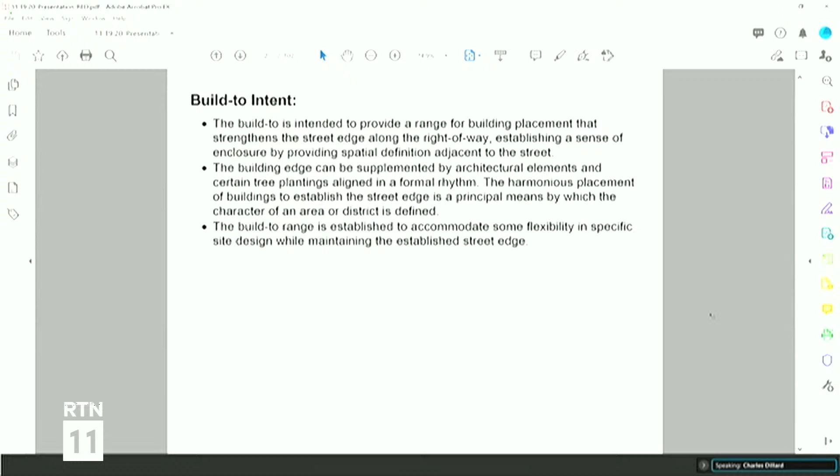I'll give you a brief summary of the alternate request here. The applicant is proposing to develop 6 new apartment buildings with a combined 154 dwelling units. The development provides 179 parking spaces, which is 10 above the minimum required by the UDO. The site is not located within the floodplain, but the southernmost property is within 200 feet of the 100-year flood zone. The property is zoned residential mixed use, 3 stories. The development provides a network of pedestrian paths and an internal centrally located recreation area, including a play area.

The applicable build-to is that of the apartment building type. The build-to is 10 to 55 feet, 70% of which must be occupied by building width on the primary street and 35% on the side street.

The applicant seeks an alternate to the primary build-to for building 1 on the attached plan sheet in your documents. The building occupies 63%, or 7% below the required 70%, and an alternate to the side street build-to for building 6. That building occupies 28%, or 7% below the required 35%.

At building 1, the proposed amenity area is approximately 28 feet wide, which combined with the building width of approximately 112 feet, brings the combined building 1 build-to coverage to 140 feet, or 79%. At building 6, the applicant does not propose additional amenity area. The proposal does meet the 30-foot corner build-to requirement at all locations.

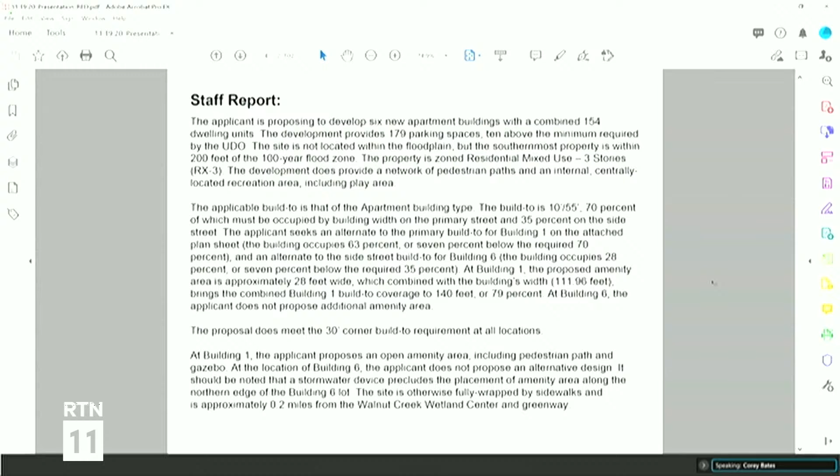Yeah, this is Tim Grissinger, 112 Pipewood Drive in Cary is my home address. 5410 Trinity Road, Raleigh is my business address.

Yeah, I think Jennifer was gonna run with this request. She's our attorney. She did set up the slide, and is that correct, Jennifer? That's right, Tim. Thank you. All right, sorry. Thank you, everyone.

As Tim just said, my name is Jennifer Ashton. I'm a land use attorney with the firm of Longleaf Law Partners. For the record, my address is 4509 Creedmoor Road, Suite 302, Raleigh, North Carolina. As Charles said earlier, the applicant for today is the City of Raleigh. I'm actually appearing on behalf of the developer, who is Solstice Partners, LLC. I'm joined on this presentation with the development team, which includes Tim Grissinger, who you just heard from, and Mike Zaccardo. They are both from the Timmons Group.

So a brief history of the project before I dive into the specific requests. This is intended to be an affordable housing complex. The City of Raleigh has contributed loan dollars to make this project a reality. Once it's constructed, the project will have 6 new apartment buildings and a total of 154 dwelling units.

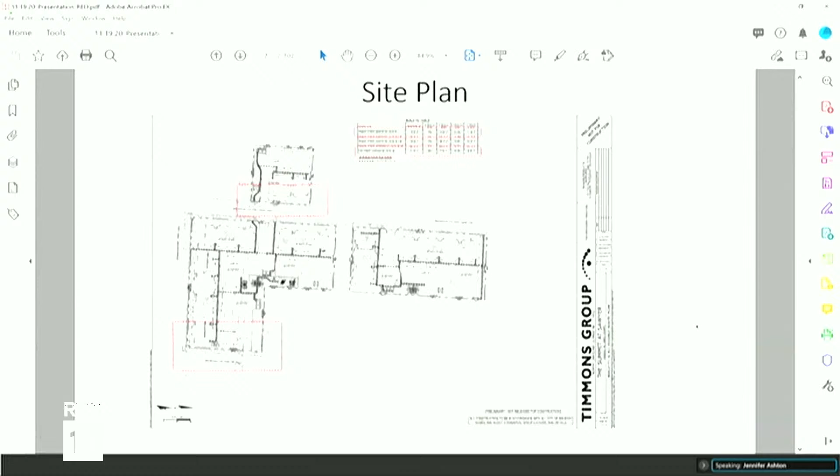So with respect to Building 6, going to this building in particular, down there is Carnage Drive, that is a side street. So for Building 6, we are not meeting the side street build to. We only have 28% of building coverage and we're short that 7%.

To, I believe, the east of Building 6, we do have what we call an amenity area. It is an open field grassed area. We are not proposing any specific amenity features in that area. We thought long and hard about this as we were designing the site, and in all honesty, there is a single family home located immediately adjacent to that grassed area. Our fear was if we put something like a gazebo or picnic pavilion, those have a habit of being noise generators, and we wanted to be respectful and sensitive to the fact that there are single family homes located right next to that area.

There were some stormwater devices located in that area. We can talk about those more in a minute if the commissioners have questions. I think Tim told me yesterday that maybe one of those has been removed from that site. But again, the reason we're not proposing any amenity features in that area is the close proximity to the single family residences.

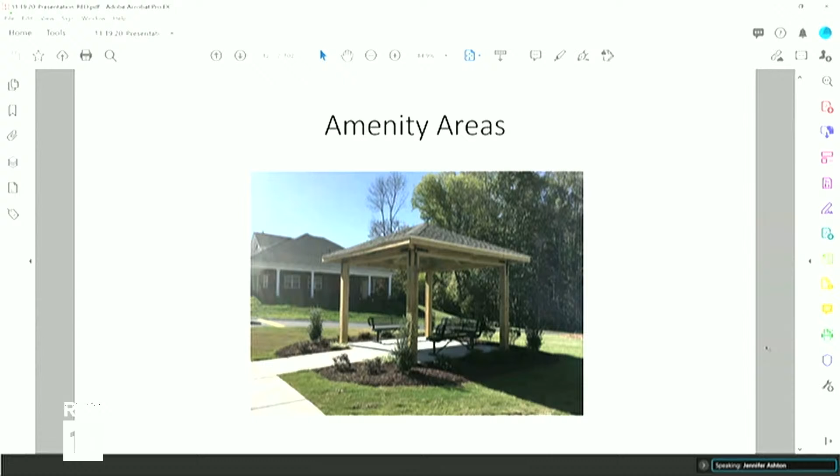Charles, if you could go to the next slide for me. Thank you. This is typical of the gazebo areas that we are proposing. Again, we have a very nice structure with some benches and some landscaping around the foundation. It's a very attractive gazebo. And Charles, if you go to the next slide for me.

Thank you. I'm not going to go through all of these in detail. We've covered them throughout the presentation, but these are the criteria the commission reviews when deciding whether to recommend approval for the administrative alternate. I did want to point out that, as I've said before, I think we are meeting the intent of the build-to requirements. We are providing amenity areas and green space where we are not meeting the specific building coverage requirements, and we are making sure there is significant pedestrian interconnectivity throughout the site so that everyone is able to not only travel within the site easily, but also reach the amenity areas easily.

With that being said, we would request that we get a recommendation of approval to the planning director so that we can move forward with this great project for the city of Raleigh. And I'll be happy to answer any questions anyone has.

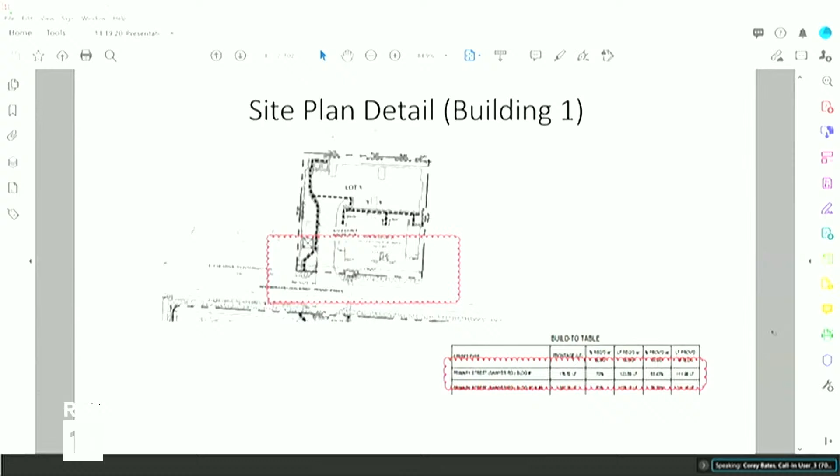This is Will, I'm in favor. Great, okay, opposed? Okay, we'll defer that. And if you can get with them, or Charles, get with them and see if we can get them -- before we move on, I want to make sure they have the feedback they need to be able to come back. I guess I would ask Jennifer Ashton and Tim, do you feel like you have enough information from the commission?

Yeah, I do. I mean, just to clarify, up there along building 1, there's not any placeholder for where that gazebo is located. I could slide it further back so it would not be adjacent to that property to the left, west in plan view. That would not be an issue at all. Like Charles said, we're trying to meet the intent of the code, but yes, that placement could be adjusted.

And then behind building 6, we can absolutely provide better illustrations as to plantings in the area of the amenity space. As previously stated, the developer is not opposed, if that was a condition you guys have, to plant that and, like Adam said, mimic the left side to the right side of the drive. There's no opposition to that. But yeah, I do understand what you guys are looking for. When would the next date be to reconsider the plan again?

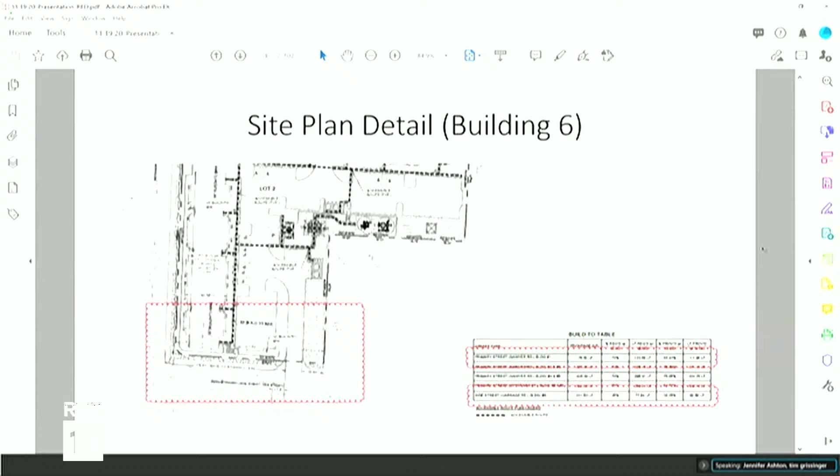Thank you all, we'll just move on. I guess it's the next case, which is your case, AAD 24-20 Toulon Place. Charles, I believe you're going to go ahead and present this one as well. That is right, thanks, Corey.

Thank you. So this is also build-to, so I'm not going to read through the definition or intent, and we'll just begin with the summary. We'll note that the applicant here is not the city, it is BB Redevelopment LLC and Passage Home Incorporated. The applicant is proposing to develop 7 new apartment buildings with a combined 200 dwelling units. The development provides 220 parking spaces, 20 beyond the minimum required by the UDO. The property is zoned residential mixed use, 3 stories, RX3. The development does provide a network of pedestrian paths and an internal centrally located recreation area, including a play area.

So I know this is just up the street from the previous case. And I do want to note that the North Carolina Housing Finance Agency does have, I believe, more stringent parking requirements typically than the UDO, so just want to flag that as an item for discussion, if it comes to that. The applicable build-to is that of the apartment building type.

The build-to is 10 feet, 55 feet, 70% of which must be occupied by building width on the primary street and 35% on the side street. The applicant seeks an alternate to the primary build-to for buildings 1 and building 4 on the attached plan along Bragg Street. An amenity area is proposed along Bragg Street, the length of which is approximately 34 feet. Thus, the combined average length of building and amenity space is approximately 159 feet, or 45%.

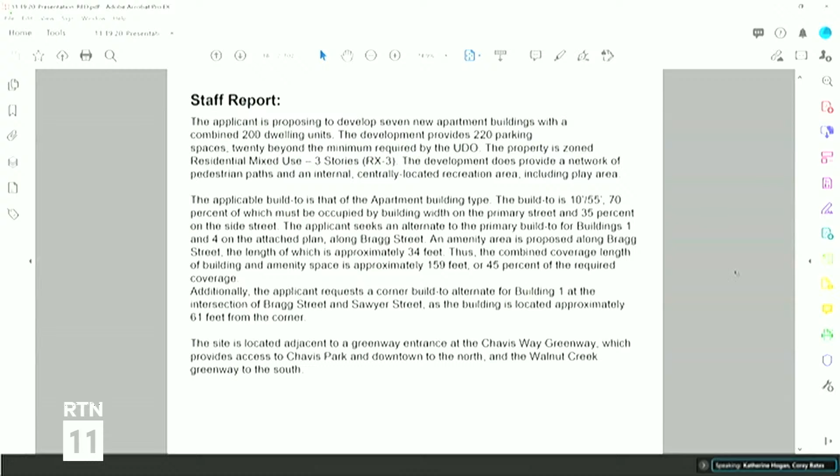Tim and Ashton and Jennifer, is this yours as well?

Are they on mute? Thank you, Chair. Yes. There you go.

For the record again, my name is Jennifer Ashton. I'm a land use attorney with the firm of Longleaf Law Partners. My address is 4509 Creedmoor Road, Suite 302, Raleigh, North Carolina. We're here today on behalf of the developer, Solstice Partners, LLC, and I am joined by Tim Grissinger and by Mike Zicardo, both with the Timmons Group.

By way of history of this project, this is also an affordable housing complex project. We'll look at the site plan in more detail in a minute, but there will be 7 new apartment buildings, 3 stories each, with 200 units total. Given that there is HUD financing and some state funding associated with this, there are heightened ADA standards, and that does come into play with our requests for the administrative alternates.

Charles already changed the slide for me, and he did a great job summarizing our requests. We have 2 requests for this. I want to focus on Bragg Street. We'll look at the site plan in an aerial in just a moment, but both of our requests relate to the frontage along Bragg Street. There's some unique topography along that street that I'll talk about more in a little bit.

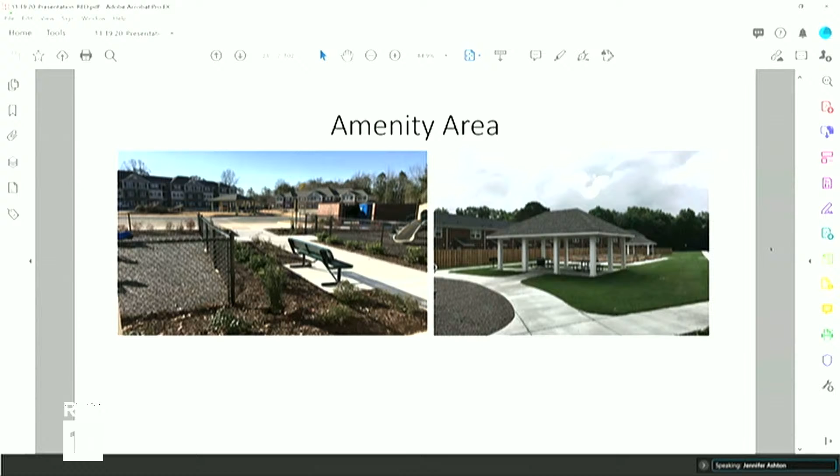If you could go to the next slide for me, please. Again, these are the same photos from the last presentation. I won't spend a lot of time on this, I just wanted to give you some typicals of what the amenity features are going to look like. You can go to the next slide, Charles.

This is not part of the Bragg Street request, but I did want to point out down by Building 6, there is also a gazebo. I did not include a photo of that in this presentation since it's not part of the Bragg Street request, but I wanted to point out that there is also a gazebo between Building 5 and 6. If you could go to the next slide for me, please.

Thank you. I'm not going to go through all of this, but I wanted to highlight that we do believe we are meeting the intent of the build-to requirements for this site. We have added substantial amenities, and we have created new pedestrian connectivity all the way from extending Sawyer to Bragg, with pedestrian connectivity throughout the site. The reason we were not able to flip Building 1 to be parallel with Bragg Street again was the significant grade drop and the need to meet the heightened ADA requirements we have on this site.

With that being said, we would ask that a recommendation of approval be submitted to the planning director so we can move forward with this project. Tim, did you have anything you wanted to add before we take questions?

Yeah, I guess I could touch on, could you go back a couple slides, Charles, showing the zoomed in portion? There you go. The 61-foot corner placement of Building 1, which you can barely see down there to the left. We were requested to tie in Sawyer Road as far away from the intersection of Bragg and Garner as possible. That was one request, and it kind of created a pinch point down there. The property to the south, which you can't really see, is City of Raleigh owned property with the Greenway Trail in that location. So that corner created by the extension of Sawyer Road and our property pinched us down to where we couldn't physically fit a building in that corner.

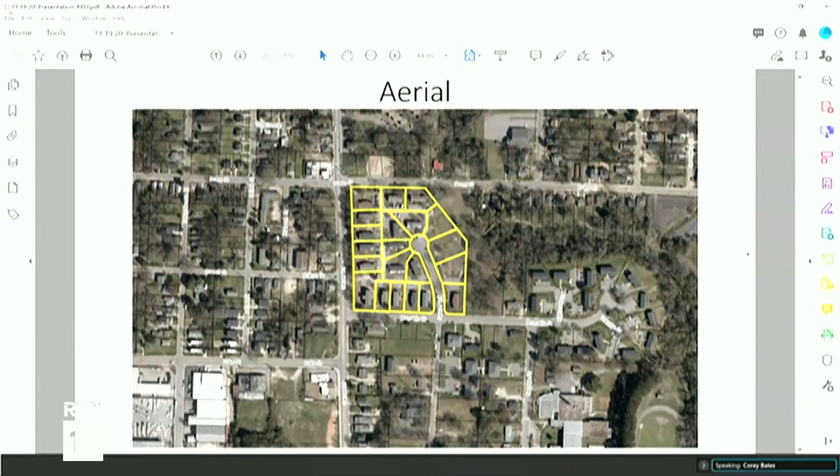Just so everybody's clear, I think the original first slide we looked at, with the overall site plan, showed north and south, and then it rotated. The one before this was, I think, just Google Earth or something. So the site has rotated 90 degrees on the other drawings, just so people are clear. Bragg Street on this slide runs north and south on the page, goes downhill as you go down the page, a substantial drop. I'm looking at it right now on Google Earth. So can you all tell me how the new street compares with the existing location of the Greenway? Is it right at that point?

Go ahead, Tim. I'm sorry.

So the Greenway, if you look on this slide, you can see it at the bottom, and it Y's right there on Bragg Street. So it interconnects - about 650 feet from our corner where Sawyer and Bragg connect. They're in close proximity, and where it Y's to the plan north, really west, it connects to the existing sidewalk on Bragg Street. So we're tying our sidewalk into Bragg at that location close to the trail. Also across to the plan east is the connection of the Greenway Trail on the other side of Bragg Street, so they line up perfectly - the southern sidewalk on Sawyer with the cross connection of the trail on Bragg.

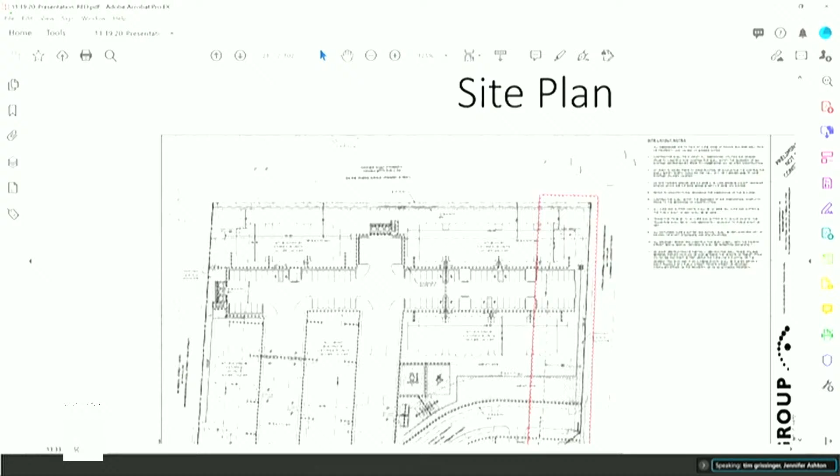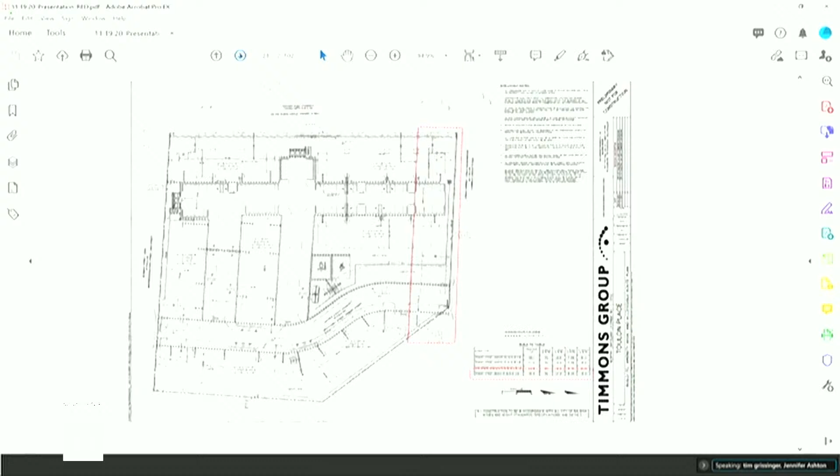If you're looking at this plan, I wish we could zoom in - well, I can. Let me zoom in, I apologize. Across from the amenities where our drive comes in, the wall grades out, and as it goes towards Bragg Street, the first turn behind the play areas is approximately 4 feet, and then where it turns to be parallel with Sawyer Street, it varies in that area from 5 to 7 feet along that wall edge, all the way until you get to the corner of Building 1 and Bragg Street. That corner where it goes up Bragg Street is about 7 feet, I think, right in that area. Again, that wall is due to the steep grades of Bragg - there was no way to really create a flatter spot. I was trying to generate an area above the wall and below the wall, and also maintain that wall, which will have to be grid reinforced, so we had to maintain a certain distance from Building 1 to construct that wall.

And will there be any crosswalks on Sawyer Street internally to the site? Yes, there will be - wherever we have a main intersection, there will be handicap accessibility ramps and crosswalks to get to the other side of the street. Yes, Candace. Okay, thank you. You're welcome.

Can you tell us the slopes on either side of the amenity area, what you're calling the amenity area, on the upper side of the wall and the lower side of the wall? Is it actually pretty flat, something they can play on, or is it trying to pick up a lot of grade quickly? No, I designed it fairly flat. Let me pull up the plans - well, I have the plans, trying to pull up the CAD file. I would say they're about 5 to 10% grade in those areas, so not extremely flat, to get good drainage around the buildings in both of those areas - make up some grade and not have a 10-foot retaining wall there. So it's a juggling aspect, getting decently flat grades and not extensively tall retaining walls. So just to be clear, that amenity area directly adjacent to Sawyer Street that's lower down than Building 1, are you saying the grades are up to 10% there? No, 5. Okay, yeah.

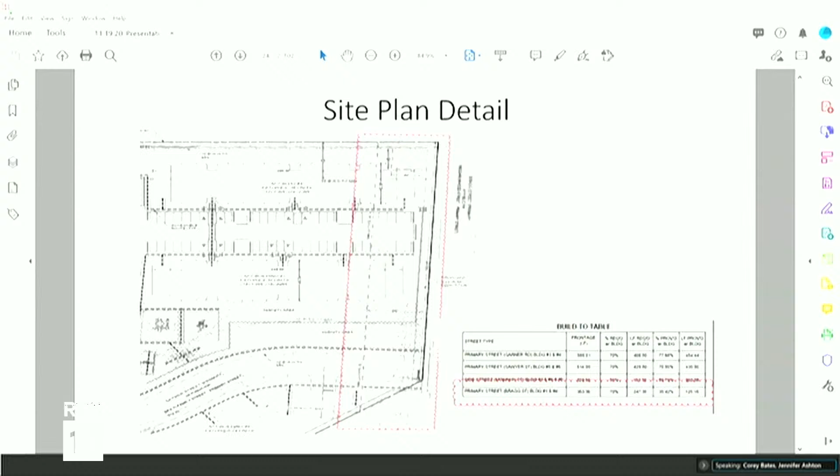All right, we're going to look at AAD case number 3. So we have AAD 25-20, 121 Fayetteville Street. This is the one that we just saw at our last meeting, so I believe mostly everybody was here, so we should have a pretty good understanding. But we'll go ahead and let staff go through it really quickly. I believe, Lee, are you presenting this one? That's correct, thank you Chair.

Thank you. Yes, this is for 121 Fayetteville Street that did just come in for a courtesy review, and they're here today to seek 4 alternates for pedestrian access, transparency, blank wall, and building massing. I'm going to read the intent for each of these, as well as the staff report, and then turn it over to the applicant for more detail. For pedestrian access, the intent is that street-facing entrance regulations are intended to concentrate pedestrian activity along the street edge and provide an easily identifiable and conveniently located entrance for residents, visitors, and patrons accessing a building as pedestrians from the street. And second, that access points should be located or identified in a manner visible to the pedestrian from the street and be accessible via a direct path.

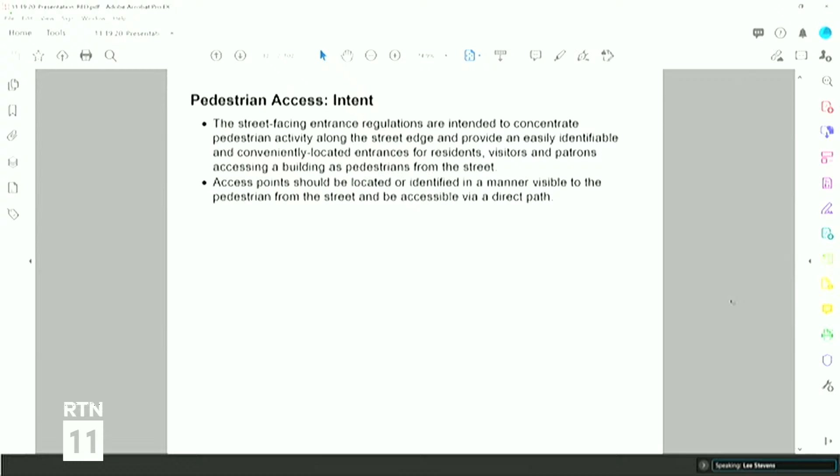In this case, the applicant is proposing to redevelop a 1.25 acre site located at 121 Fayetteville Street, zoned downtown mixed use, 40 stories, shopfront frontage. The site currently contains a parking garage with retail spaces on the ground floors along both Fayetteville Street and South Wilmington Street. The applicant is proposing to build a 32-story mixed-use building on the southern portion of the site. Although it says they'll retain a portion of the parking garage, they're actually going to tear down the existing parking garage and rebuild their own.

The applicant is proposing entrances along Fayetteville at intervals of 50 feet or less, except where the elevator bank sits, where there will be a distance of 73 feet between doorways. I'll also state that for downtown shop frontages, we require 50-foot spacing between entrances.

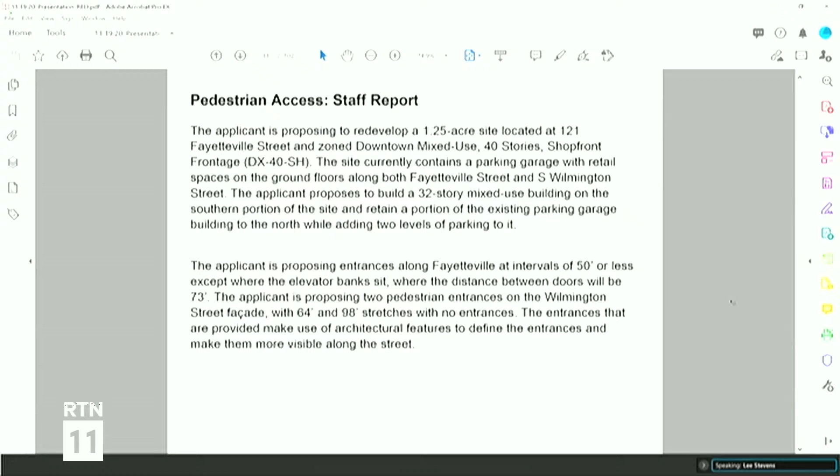The applicant is proposing 2 pedestrian entrances on the Wilmington Street facade with 64 feet and 98 feet stretches with no entrances between those. The entrances that are provided make use of architectural features to define the entrances and make them more visible along the street.

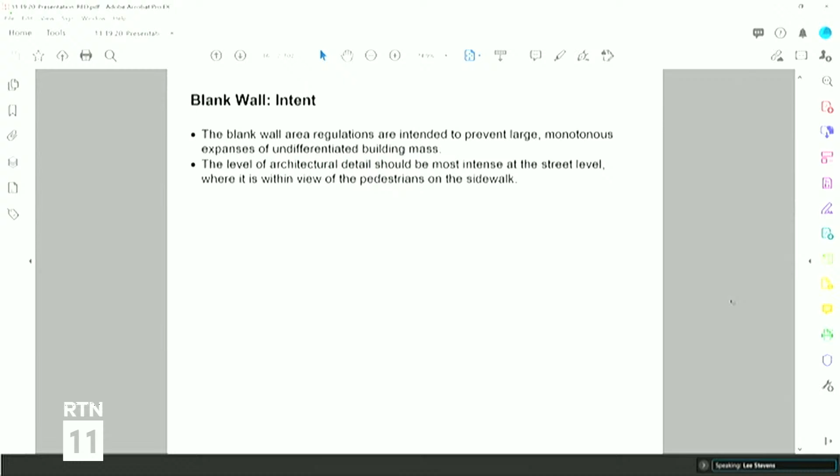The east elevation of the building contains 37% blank wall area comprised of articulated metal screening, and the west elevation has a blank wall area of 24%, which is also articulated metal screening. The applicant is proposing to use folded architectural metal panels, aluminum trim, color variation, and a large art installation to offset the blank wall areas. The level of architectural articulation and detail is concentrated at the street level to emphasize visual interest for pedestrians.

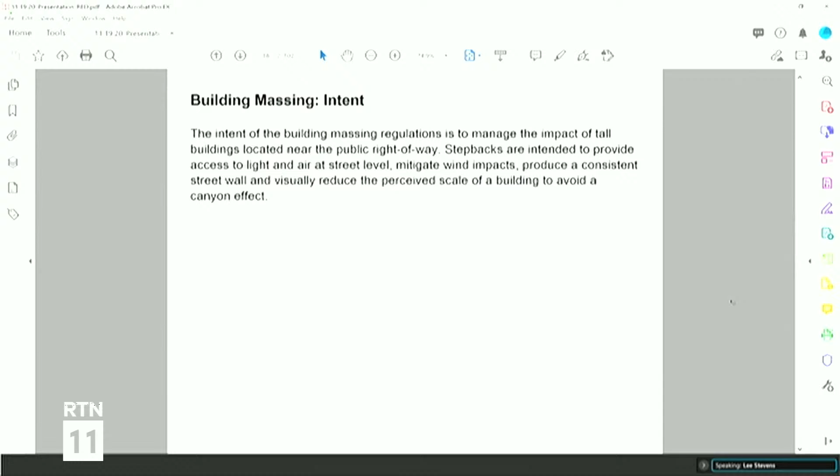Now for building massing. The intent of the building massing regulations is to manage the impact of tall buildings located near the public right-of-way. Stepbacks are intended to provide access to light and air at street level, mitigate wind impacts, produce a consistent street wall, and visually reduce the perceived scale of a building to avoid a canyon effect.

The applicant is proposing to develop a 32-story mixed-use building. As proposed, the building does not meet the massing standards that require a 15-foot minimum step back between the 3rd and 7th floor on both the Fayetteville Street and South Wilmington Street facades, which will both have 0-foot step backs.

In the attached information, the applicant describes a 100-foot step back to the north towards the historic state capitol building. The applicant also mentions that there are material changes between the ground level, parking levels, and office levels to mimic wall plane change and delineate the facade. The applicant has provided plans, elevation, and renderings to illustrate the proposed design.

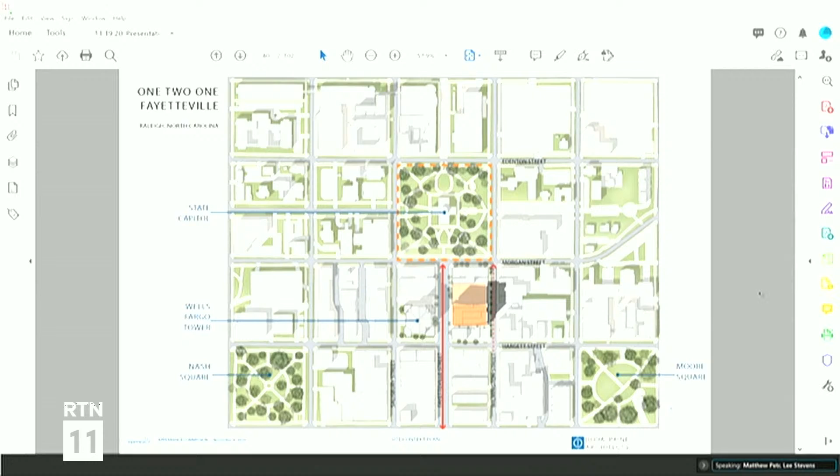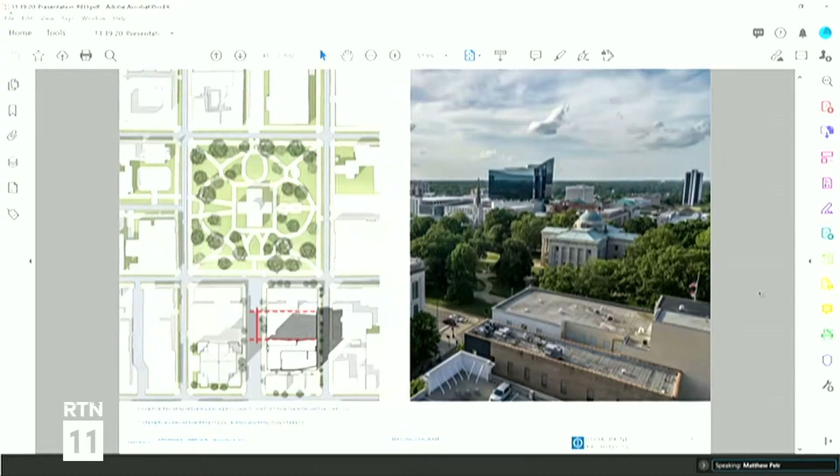If you just want to click through, this was the datum slide. There's a sketch that Tehran provided. You can keep clicking through here, and we'll get to a ground floor plan that's colored, and I'll let you know. Anyone, if you want to stop on something, please just let us know.

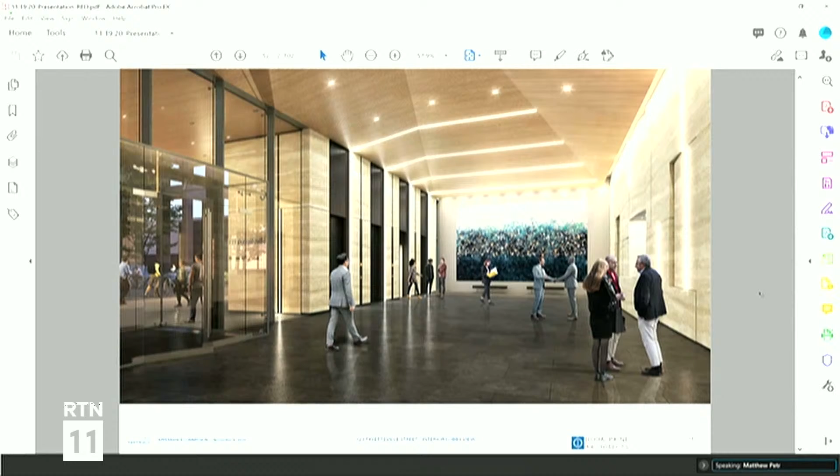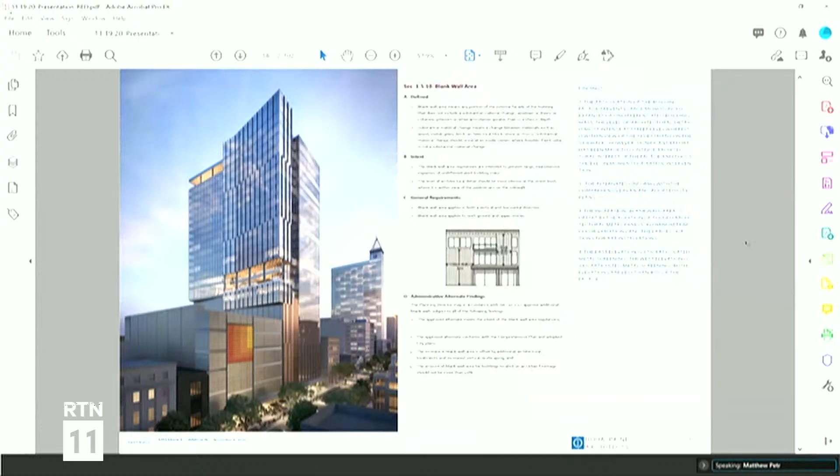Lee, if you keep clicking through, go to what I believe is the last slide of ours here - the more detailed site plan that's with the ASR submission, because there's also some trees that will be added. It's hard to see here, but if you were to zoom in, you could see there's trees going to be added to the pedestrian passageway too. That's another really important element of this project, because the existing passageway is kind of underutilized and underdesigned.

So McAdams and the team were tasked with coming up with a new design for it. There's a few really small trees that'll be planted in there, along with some softscape, and then all new hardscape in between. So I hope that answers your question on the trees.

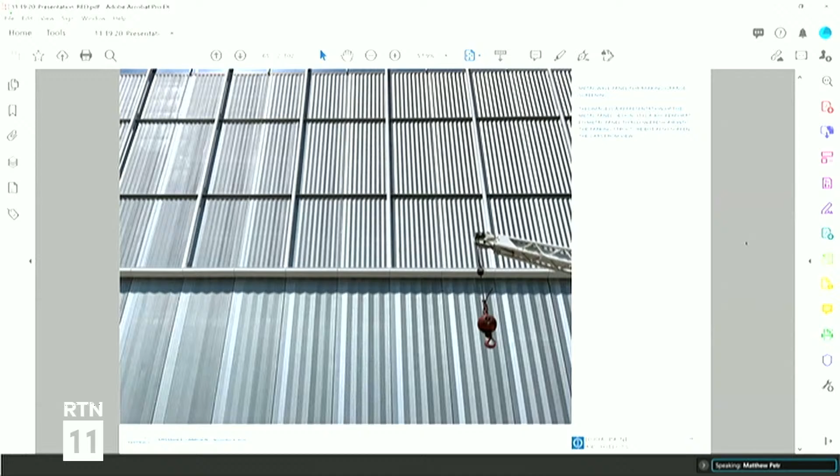And then if you go back one slide, you can see the perforated metal panel. Just a caveat here, this is another project, so ours will be a different design. But for those of you familiar with these perforated metal panels, this is a panel done by Morin, and what's really great about this panel is they have two profiles that we like to use in some instances to create more grain and texture.

So in part of the building, we use the profile you'll see on the bottom, which is a 12-inch wide panel with a single fold that has a wider texture. In other places where we try to reinforce other elements in the building, we use the smaller panel that has two folds in the same 12-inch panel, giving it a finer texture. So you can change color on the panels, but you can also change the number of folds to create a finer grain.

Those things allow us to create variations in the envelope that help reinforce some of the elements on the exterior. And then the other thing we always like to do is when the building sits above the parking deck and we have the glazing—you can see it at the top of the screen where we have mullions and articulation—we carry those lines down over the garage skin so that it feels like a unified, cohesive design.

This is a different project that's under construction right now, but we're using the same panels on this project and the same perforation pattern, a 40% perforated round staggered pattern, to allow for an open parking garage per the code.

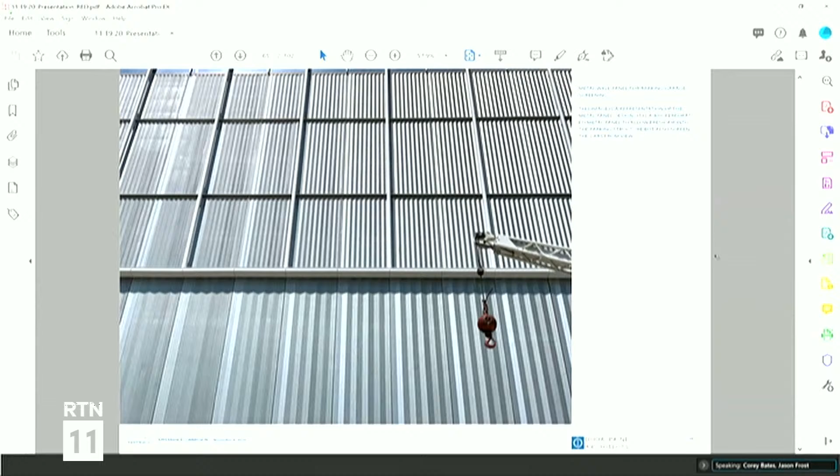Potentially. Lee, could you go forward one slide to that new site plan? I think it's 66. Could you zoom in on that area? Because I don't think we've got that in the material I saw.

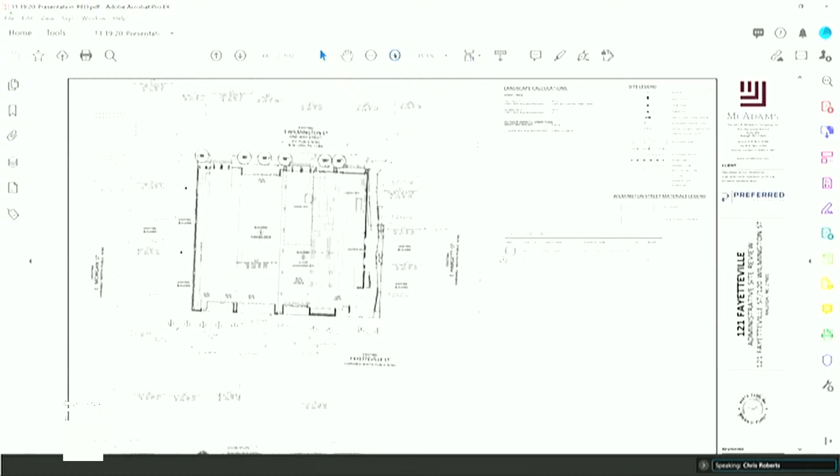Do you need me to go in any closer? Is that a good view? Maybe just a little bit more if you could. Thank you.

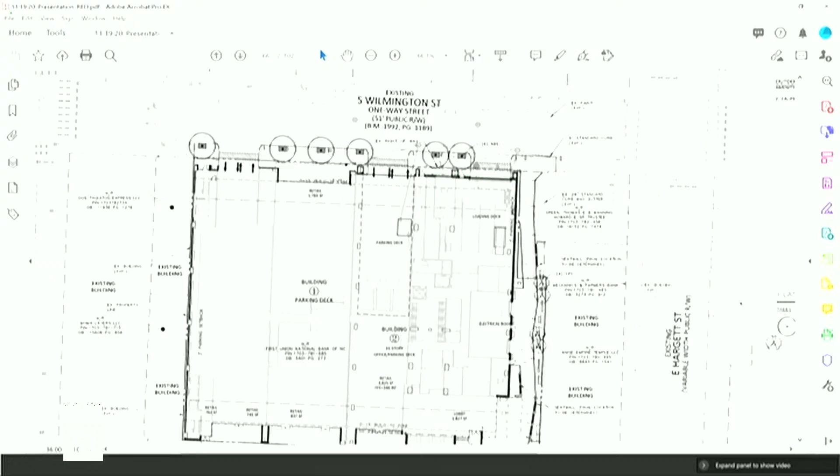And Dave, can you talk about the species of tree as well? I think it's on the top right corner of this image. Yeah, Wilmington is trident maples. The Fayetteville Street will be the oaks to remain. And currently in the gallery we've got dogwoods, but that could potentially change as we move through CDs within that space. It will be small upright, just given the conditions down there, the canyon-like conditions.

Thanks. Thank you. Yeah, that's good. Thanks. I've got another question on...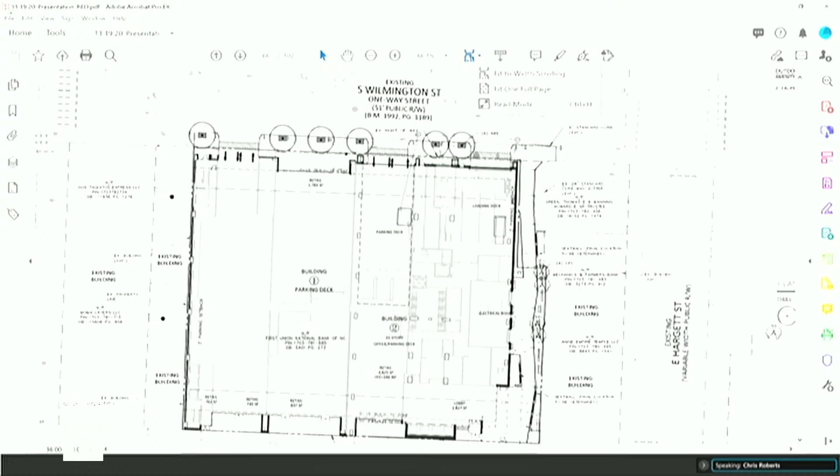The first floor site plan that showed the street trees, unless anybody's got any other questions on this sheet. No, I was just going to say thanks for showing those. I think the maples are playing off of what's already there. Isn't that right, Dave?

Correct. They just won't be the sad wisps that are out there right now. Yeah, they are grouped tightly, but we were able to get the full code minimum in there and incorporate the driveways.

While we're looking at this, why is there a gap between the trees on Fayetteville? Is that an existing gap? Do you know what that's about? That's the current entrance to the deck, so there's the wide painted pedestrian crossing that goes over to the Fargo Plaza.

So how are you all going to deal with that? You don't want to put trees there once you get rid of the entrance? No, we're not disturbing anything outside the property limits. So all that's the city's right of way and part of the larger pedestrian crossing.

I'll also note that pedestrian crossing will still be used. A lot of this parking on the north side is serving that building across the street, so that's something we were taking into consideration as well, making sure those users have a clear pathway to that project.

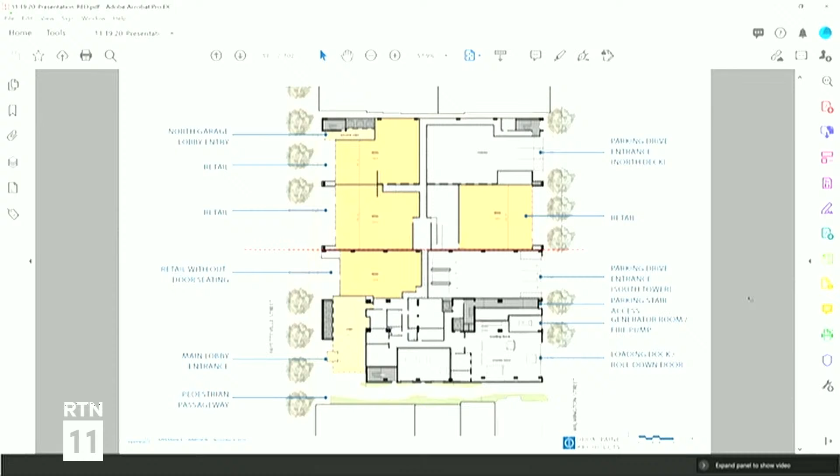Bear with me as I'm getting through to my... Corey, I've got the findings for transparency up on the screen. Thank you, so these are the findings we need to look at.

The approved alternate meets the intent of the transparency requirements. The approved alternate conforms to the comprehensive plan, adopted city plans, and the street-facing building facade utilizes other architectural treatments to create visual interest and offset the reduction in transparency. I think 1 and 3 we've gone through, and I feel pretty confident that we meet the intent. The approved alternate conforms to the comprehensive plan.

If we can look at our policies and throw out a few. Policy UD 1.4, maintaining facade lines.

UD 2.3, I think activating the street. Yes, I think it does that. UD 4.5, improving the street environment.

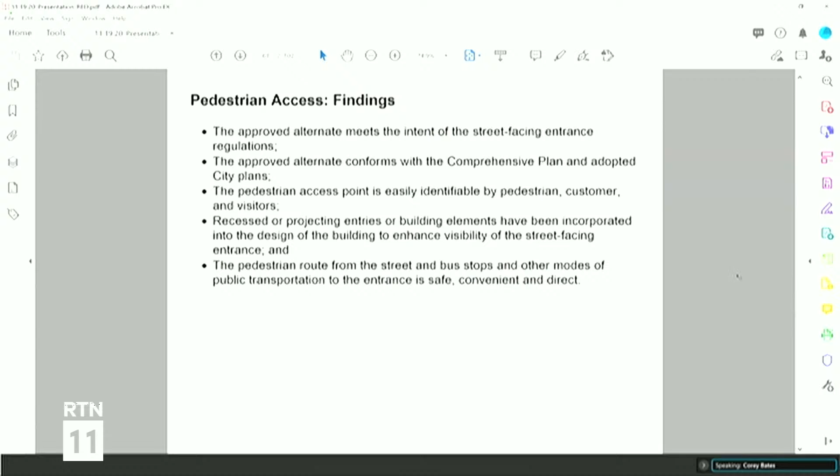So if we can look at the findings: UD 1.3, LU 5.1, UD 4.5. Okay.

All right, that's good. Do we have a motion? I'll move to approve this one too. I'll second it, Chad? Second from Chad, motion from Chris. All right, all in favor? Okay, any opposed? None being, that passes unanimous.

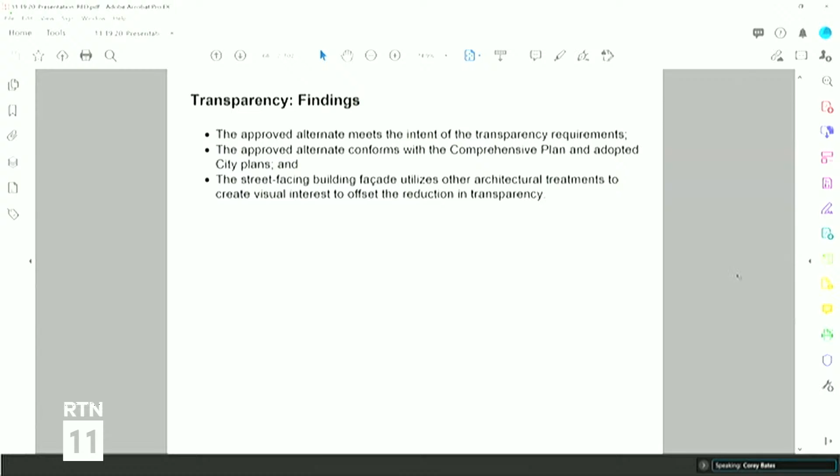All right, let's move on to blank wall. Blank wall findings: the approved alternate meets the intent of the blank wall area regulations. The increase in blank wall area is offset by additional architectural treatments and increased vertical landscaping, which we've talked about both, I believe it does. The amount of blank wall area for the building located on the urban frontage should not be more than 40%.

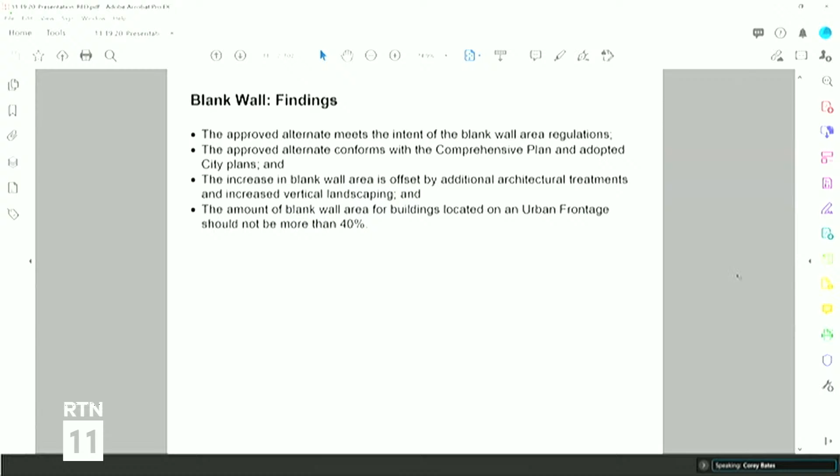Any questions with any of those? Being none, let's go to the approved alternate conforms with the comprehensive plan, adopt the city plans. Can we look at those findings? UD 1.2. That's UD 1.3.

Any others? Okay, I think that's fine. Any other comments? None being, do we have a motion? Motion to approve by Chad. I'll second that, Chris? Motion from Chad, second from Chris. All in favor? Any opposed? All right, pass. And the final one is the building massing.

Again, I think we talked about this last time, I think we've seen this before. There's a text change that they're looking at on the table. I think it's a beautiful building and they did a great, fantastic job. So let me see if I can get to these findings. Somehow I messed up my computer.

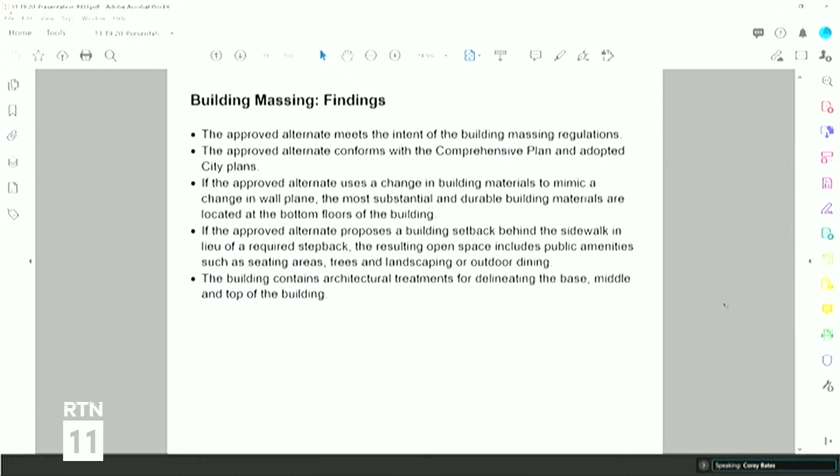Okay, the approved alternate conforms with the comprehensive plan, adopt the city plans, and substantiate that. LU 5.1, LU 7.4 scale design, UD 1.2, UD 1.3, DT 7.5. All right, that's 5. Did you get all those, Lee?

I'm going to read them back to you just in case. I got LU 5.1, I think what 7.4 - I didn't catch what that one was. LU 7.4, thank you. LU 7.4, UD 1.2, UD 1.3, and DT 7.5. Correct. Okay, wonderful, thank you.

All right, any other further conversation? If not, do I have a motion? Motion to approve by Chad. Second, second from Adam. All in favor? Any opposed? Okay, that passes unanimous.

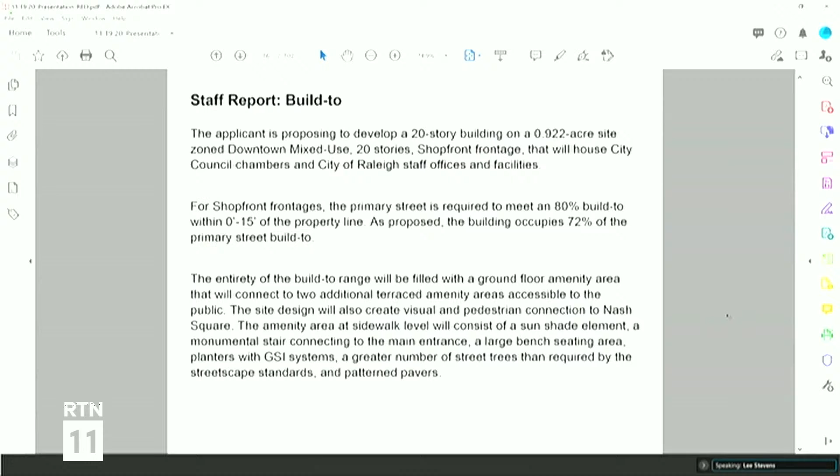The entirety of the build-to range will be filled with a ground floor amenity area connecting to 2 additional terraced amenity areas accessible to the public. The site design will also create visual and pedestrian connection to Nash Square. The amenity area at sidewalk level will consist of a sunshade element, a monumental stair connecting to the main entrance and to the terraced amenity areas, a large bench seating area, planters with GSI systems, a greater number of street trees than required by streetscape standards, and patterned pavers.

Now for building massing. In lieu of the required 15-foot step backs on both Hargett Street and McDowell Street facades, the applicant is proposing an increased setback of 15 feet for the building to extend the sidewalk area and provide greater amenity space to the public realm. Awning elements at the first and second floor create facade articulation to help reduce the perceived scale of the building, and the terraces on the western facade create a 70-foot step back at the 3rd floor.

So now I'm going to turn it over to the Civic Campus team to talk more about the project. Aaron, if you could unmute Andreas, I believe, and Daniel, they will be our main presenters.

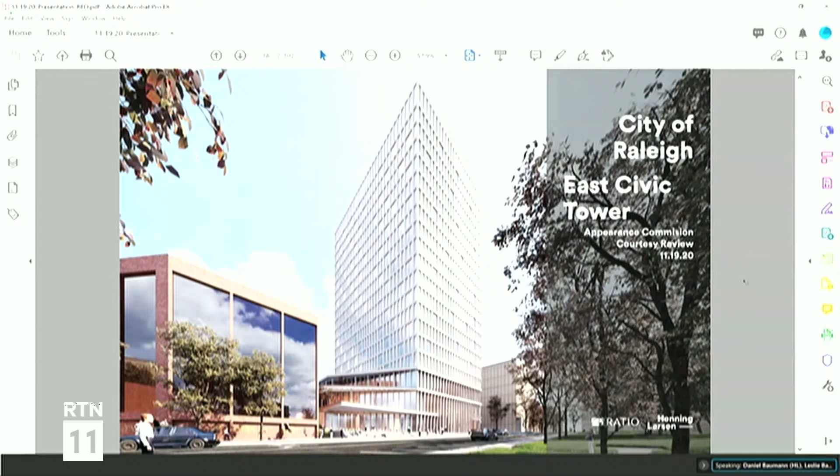Great, thank you so much, Leslie. I'm excited to take you through the project. We're going to go through two things: a project introduction, introducing our design thinking, and then zooming in on the key zoning items we want to discuss with you guys. Let's start with the project introduction.

The overarching ambition here is for us to create a civic icon, a place for people, and really create a face for public service. Our location is right on the intersection of Hargett and McDowell, opposite Nash Square.

Our ambition is to create a beacon in the city, part of the urban landscape. We want to lift the tower up seemingly from the lower floors, opening up the lower public-oriented floors that have public function to the city. This is the overall idea: a solid tower that sits on a very transparent and light base.

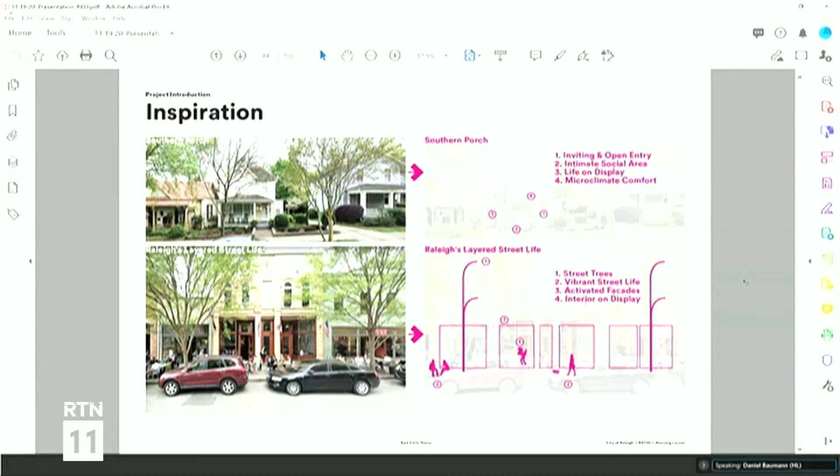Our inspiration comes from Raleigh. We love the idea of the southern porch as this inviting, gestural element that creates invitation and puts life on display, with an aspect of comfort and microclimate. We also observed the street life in Raleigh—these layered facades, the textures of the trees, and putting the interior on display.

On the ground level—this is from concept design, which we're working towards updating—we're proposing a large interior lobby connected to an outside amenity area, and an interior public service area that will consolidate a number of public functions in one connected area for a one-stop shop.

The second floor is also public and publicly accessible. Here we'll have the council chamber, access to a public terrace overlooking Nash Square, and an art gallery available to visitors. Visitors can come and see the council at work and democracy at work.

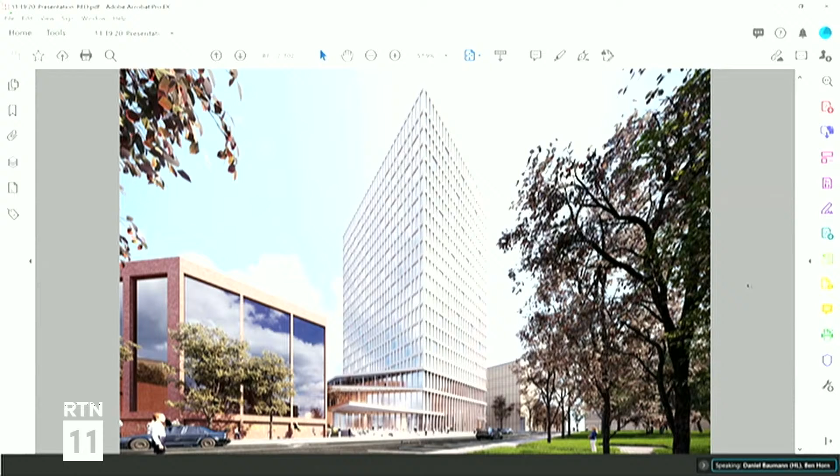This is a preliminary view of the building. We're currently working on developing the facade, but this is the overall expression of the building as we're anticipating it, and the overall massing as it stands now. What you can see here is this transparent base of 3 stories that are publicly oriented, and the canopies we're trying to develop create shaded areas that at grade are amenity areas, and on the upper levels are publicly accessible terraces related to the interior program.

The key building metrics show the overall tower massing. We have 3 public floors with terraces to the southwest, fanning back to provide terraces at every level related to the interior program. Then we have an efficient administrative building on top of that, taking us up to 20 floors, around 300 feet.

For the ground floor, our thinking is to treat this as a civic porch, connecting and linking it to the park. We're working actively to be considerate about our ground level landscape design, but also incorporating larger elements that will activate the ground plane and knit the inside and outside together.

In this view you can see how we're starting to think about the public realm and how that landscape from the park is fanning up at grade, introducing itself at every level of the building, trying to create a linkage between Nash Square and the building on the other side.

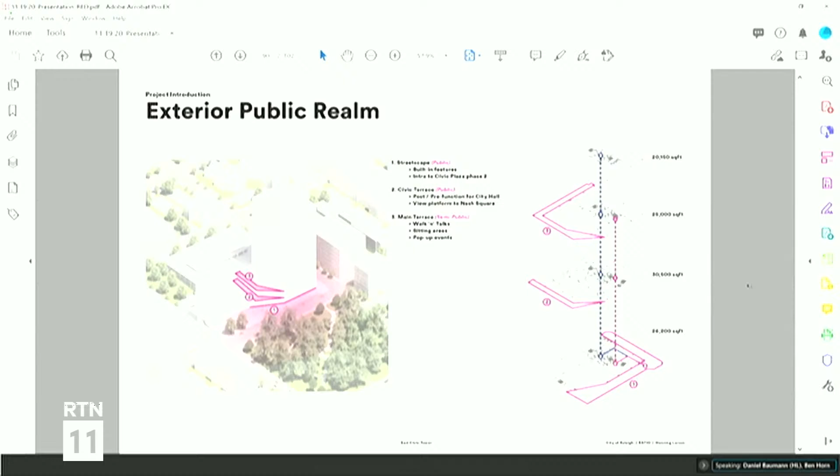On the site plan at grade, we're anticipating a planted area, a series of street trees along Hargett and McDowell that will create shade, and a furnishing zone in between. We're working with this large element of the civic porch. The entrance is from the corner of Hargett and McDowell, and this covered area is where we anticipate arranging public lectures, introductions, and smaller functions before going into the actual building itself.

We're anticipating some pervious and impervious areas here. This is just a preliminary take, we're designing this as we speak, so we'll figure out how to incorporate this in a way that works with the overall planning strategy.

Our boundaries in pink are shown here as the property line, and we have a 16-foot streetscape requirement from the edge of curb on both Hargett and McDowell. We're allocating a 15-foot amenity area along the south and east part of the site, folding back on the southwestern portion to create this increased amenity area and large feature stair, working with seating arrangements and incorporated plantings.

We're incorporating some safety features, looking to do those as part of the design in order to make them part of the overall expression—so just secure, but also playful.

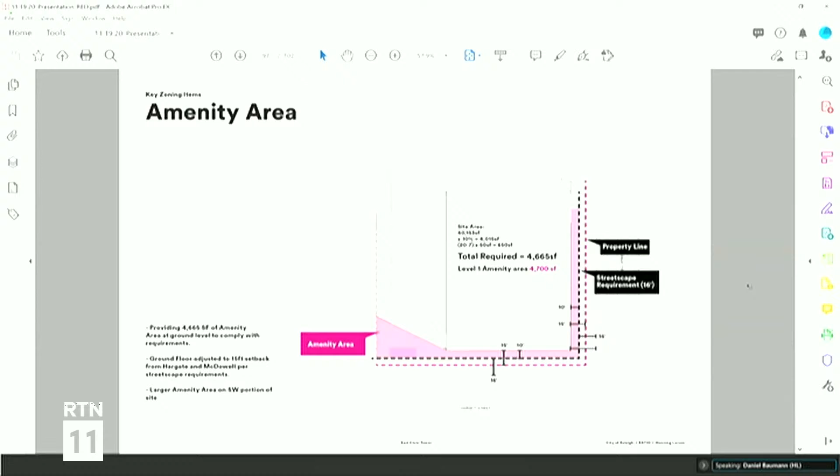So we really wanted to work to maximize that area at grade. That really creates an interior and exterior connection.

Here, because we're providing this amenity area at grade, we're creating this 15-foot zone, which the design anticipates as a setback in lieu of a step back above the third floor. Because of this, we're planning to seek a design alternate that would allow this setback to be done at grade instead of after the third floor.

That allows us to both provide the 15-foot amenity area, extending that on the south and eastern part of the site, but also have terraces on the west part of the site that can cascade up and get that effect of linking back to Nash Square that we really like. But that's a little bit dependent on pushing the tower out as far as possible to the south and east.

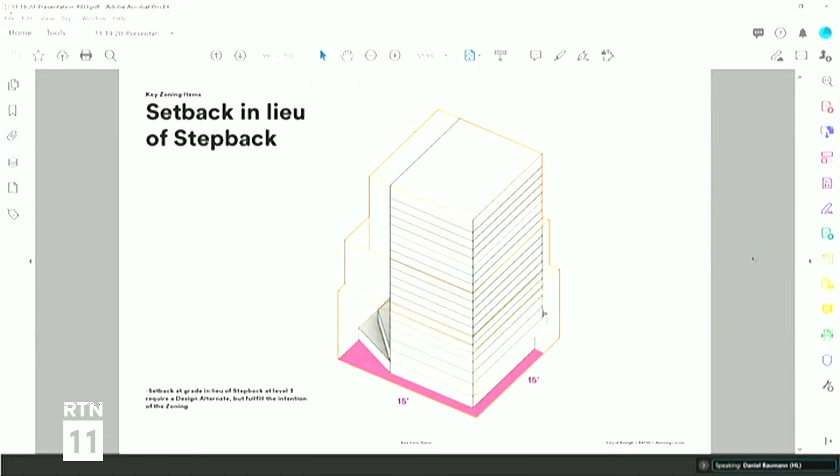This is a preliminary view, still a little rough, but this is where we are at the moment. We're working with a very open and transparent facade here at grade, and we understand the intent of creating this 15-foot stepback above the third floor is to create a distinction between the tower and the podium. That's also part of our concept, trying to create that same effect with two differentiated facade systems.

So here at grade, we're working with this idea of an arched light facade that distinguishes itself from the top, which is a more solid, regular facade with more of a civic feel, and also plays with the effect of the street trees we're trying to create here.

You can see some things we're working on with grading on the steps. That's still to be worked out, but what we're really anticipating is a very green and lush area, both under the canopies and under the street trees, creating this transparent base with a more solid tower on top.

This is a view from Nash Square. You can see how we have this heavy tower, this strong building standing in the corner, marking itself prominently onto the skyline. We're trying to create a very light base that creates that differentiation between the base and the tower, which we understand to be the intent of the UDO requirements.

The next issue is the build-to requirement. Because we're providing this amenity area and want to create this large staircase and feature stairs on the southwestern portion of the site, we're creating an area here that's non-compliant, which will basically be given over to public amenities. We're trying our best to keep all the interior program out to the build-to zone, but most of this area will be programmed from the inside as very active use.

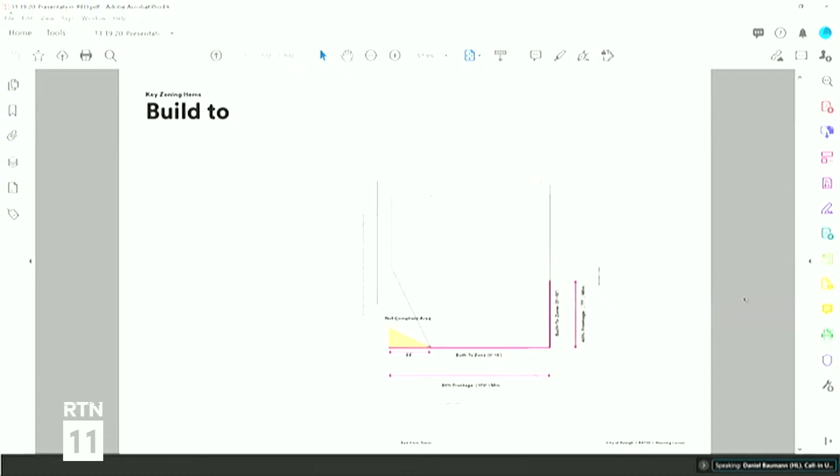Lee, would you mind going back one slide so we have the rendering up while we're talking about it? We may need to go back to a couple of the other renderings. I think this one's great, a good one to pause on for a minute. This is a really interesting building, a really interesting first glance at how y'all are thinking through this.

I'm interested a little bit in the circulation patterns, especially in this view we're looking at now, exactly where the entrances are for the public, and how you see people flowing through the space. I think there was an early slide about that, but I'd love to hear a little bit more about the connection to the sidewalk, to Nash Square, and especially for this part of the building facing us in this diagram, those three public terraces, how you're thinking about the pedestrian and public experience there.

Thank you. Jake, let me add to that because I think this is an important comment. One thing we talk about is how we're transparent to the public, but we've got these fin expressions on the first three stories that are great. For all the pedestrians walking oblique to that, what they see is non-transparency. So I'm trying to reconcile understanding the architectural concept versus the actual experience of the public addressing that. Just touch on that, please.

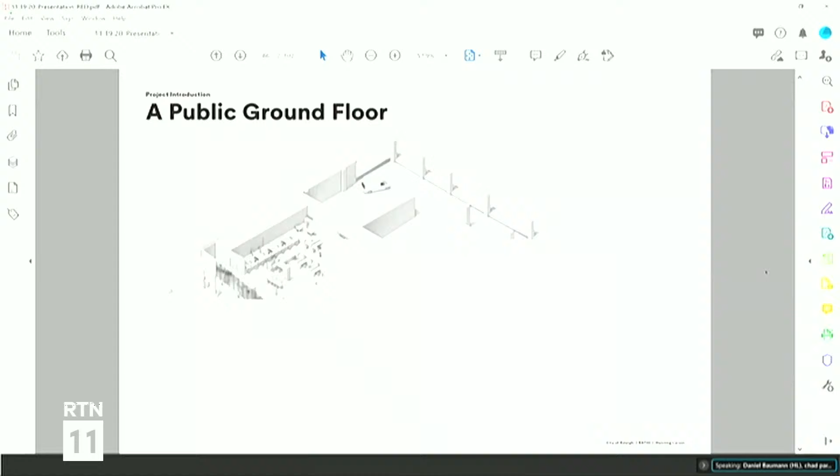And the public zones are great. I mean, the ground floor, the front porch, all those concepts, I think, are dead on. Great, I'm excited that they resonate with you, Chad. I think we're really trying hard to make this contextual and feel like it's coming out.

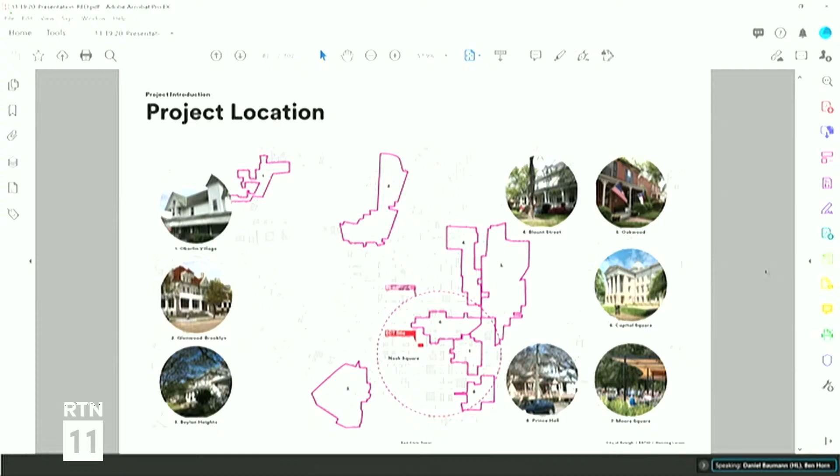Oh Lee, if you go forward to the axon—this one. Yes, sorry, I was going to say I think I swept past it. No, that's perfect. So also Leslie, feel free to jump in if there's anything you want to know. I don't want to be hijacking the microphone since I can't see you.

But you're fine, I just wanted to walk through the flows a little bit here. So I appreciate the comment on the ground floor and the openness in the cafe. One of the challenges we're dealing with a little bit here are the security requirements. So as you can see in the yellow and the green, this is basically the two main flows we have for the corner entrance.

And then you're going to go through a security screening, so we have some queuing area. Once you're inside the lobby, you're basically considered as being in the secure area. And part of the requirements is to have just a singular point of entrance, so once you're in there, that is also where you're going to go back out.

So there's control of the entrance and exits. We were for a long time debating creating a secondary entrance or an entrance from that main stair area that we're creating on the west side. But since that is unfortunately not possible, our second best thing is to create that interior cafe as a grab and go, where you then have to go back out again with your coffee and go sit and find a place on the stairs. I don't know if that makes sense.

No, it does. The challenge of civic buildings is you want them to be inviting and transparent, but you have certain security requirements and sometimes blast requirements you have to hit. Those seem to be in tension at times, and the magic is how you blend the two and achieve both at the same time. So I think it certainly is a challenge, but it's also the opportunity.

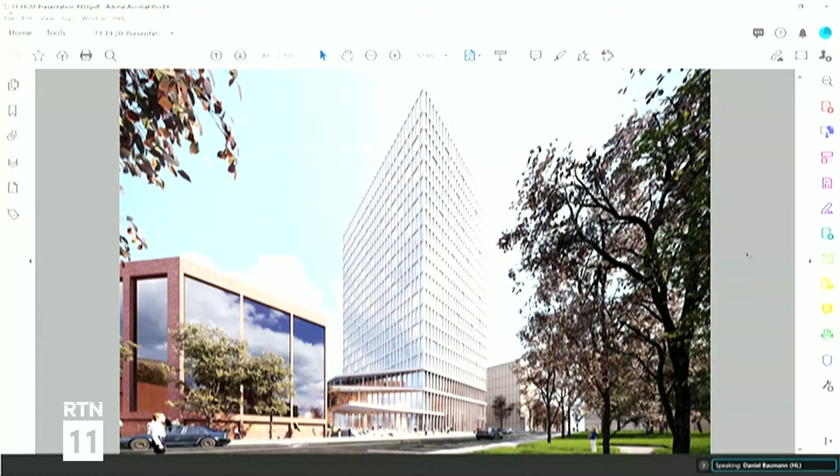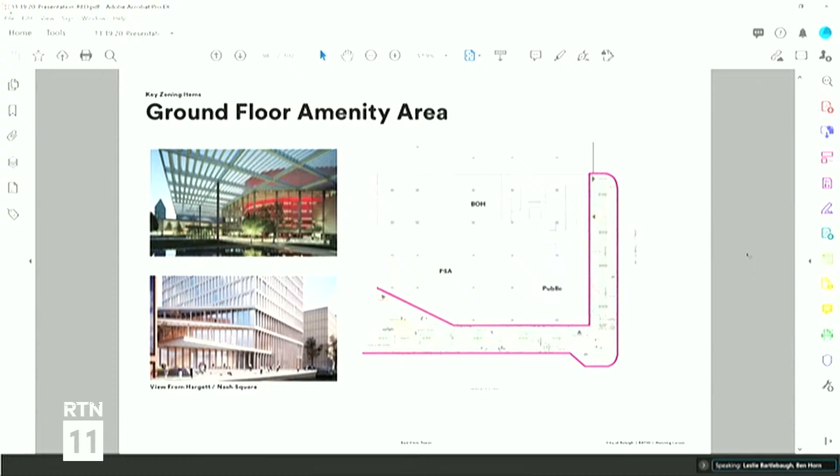Lee, can you try to go forward to the landscape plan? Yeah, I was going to supplement that as well. A fair portion of the amenity space and streetscape on McDowell is actually activated as well. It is a very fast road, and it's not as pleasant to spend a lot of time stopping there, but at the same time, we wanted to show, simply, the landscape plan.

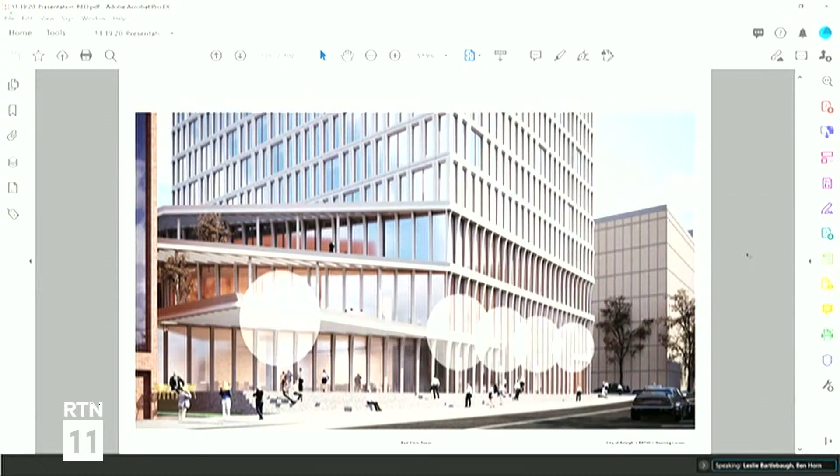You can see it in that borderline between the streetscape requirement and the property line. We're considering a fair number of planted areas to act as a buffer. We're working on understanding the streetscape requirements there and making sure we're conforming. But at this stage, we're trying to make both of those part of the extension of Nash Square with that vegetated area, and also a buffer, so that it's pleasant to spend time on McDowell Street as well, because Hargett's easier to spend time on.

I think that makes sense. I think it's the right way to approach it. I'm sure there's a lot who'd disagree with what I'm here to say, but I'd rather have one phenomenal facade and experience than half on either one. But I do think the right move is to create that landscape buffer on McDowell, to help alleviate that velocity change from Hargett to McDowell.

But I do want to reiterate — this is a civic building, a public building. How in the world do we make this an amazing pedestrian experience? That's the charge.

And once you get above those three stories, I'm being a little careful of the facade and its rigor, but at the same time, we all know the first 40 feet of a building are the most important of what people experience. Above that, sometimes what's more important is the interior experience.

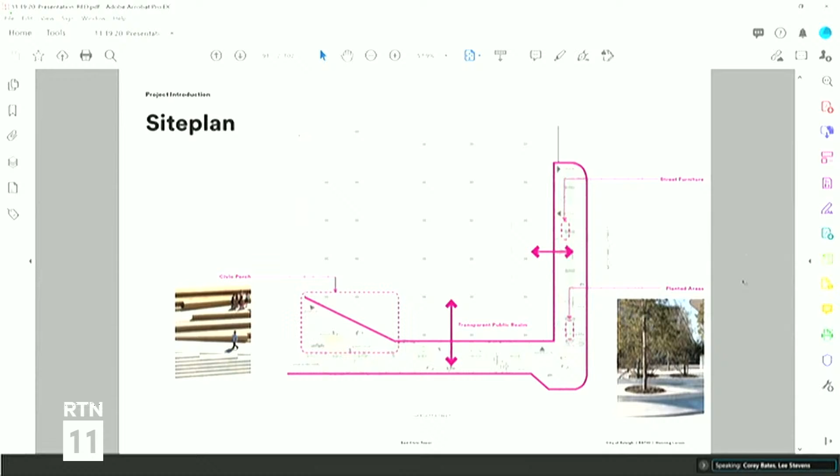If only. Hey, Lee, could you go back to 89? Yes.

So I love this diagram because from the pedestrian landscape perspective, it shows an opening between the West Tower and East Tower. I'm just wondering, I see the carving out of the street face on this East Tower, but where is that going, and do we know what's happening with the West Tower? Because the way it's carved out, I'm wondering where that's taking people, and if I want that to be a true diagram, can you talk about that?

I think the West Tower's footprint, I don't have that information right in front of me, but the space and use in the second building is going to be different. There's more space on the west lot and the building will have a different use. The intent is that most of the civic plaza between those two buildings would happen on that site in lieu of this one, because this building's going to have entirely city staff, public access to the council chambers, the public service area, etc. I believe the west building in the master plan will have quite a different mixed-use situation. It was hard to design a public realm responding to a future grand plaza that we don't know when it's going to happen yet. That's been challenging, so we're trying to set the stage to allow those things to connect across.

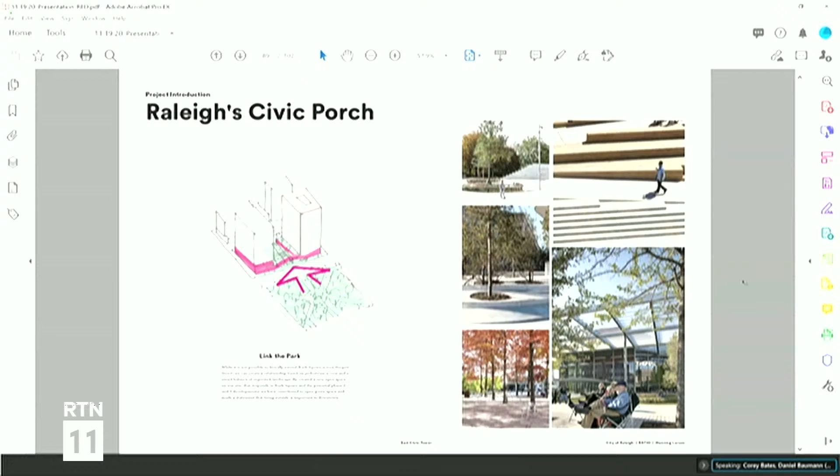Or actually just one of the, as soon as we get to a plan, we can take that conversation. Yeah, you go one further.

So the idea is currently to allocate one level of parking underneath it. On the north towards the existing structure, we have a drive lane that takes you into a back of house area. The idea is that whole area is going to be secure, so you'll be driving into an open back of house situation contained within some secure perimeter, and from there descending into the underground garage. In the back, where you have that little van parking, that is the loading and delivery area.

I unfortunately have to go, but just in closing comments on my end, this building will represent who and what we're going to be for the next generation. I think we all have the responsibility to do something great, whatever that becomes. So I encourage you all to think about what we can do that's going to really set this building apart and make a great experience. I think you recognize this is a pedestrian thoroughfare stitching the traditional downtown of Raleigh with the warehouse district, so let's not miss the opportunity to make that an incredible experience and tell a story of who we are as Raleigh and where we're going. I really appreciate the effort.

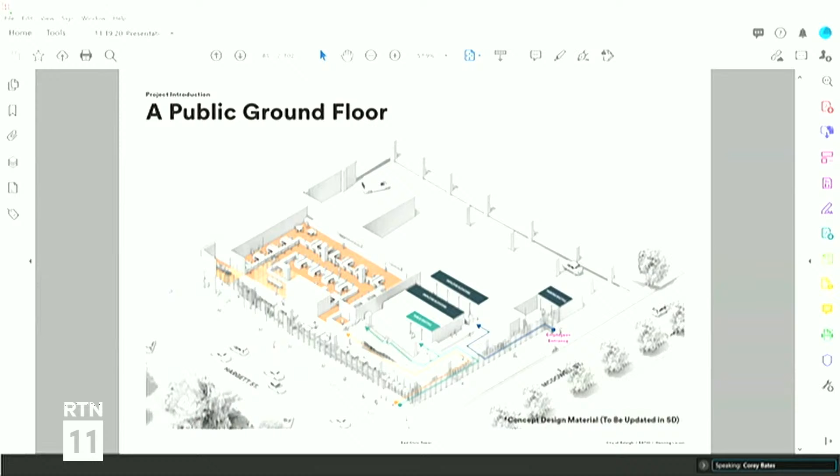So how about we talk about Sir Walter Raleigh really quick? I'll make this quick, but I emailed the committee earlier today to say that we have the go-ahead from Peter Lamb and the Wolves to engage their services for some recorded music to open and close our event, to have some of that feel of what the live event brought. So we're ready to move forward with that. We have a final design created from Lincoln Hancock for the certificate, and so I will be moving forward with him soon.

And then I got some good news today from RTN that they're going to be helping us do the technical portion of the video editing. So city staff like myself that aren't quite as experienced in that realm have a big burden lifted off our shoulders. Big thanks to RTN for that. And Katie Dombrowski, our community engagement specialist, is going to provide assistance if anyone needs help creating videos. So as you all start creating, those of you who have signed up to present for some of the awards, if any of you need help with the filming process, let me know and I can get you coordinated with Katie to help on that front. And then the same will go for our winners as they create their videos.